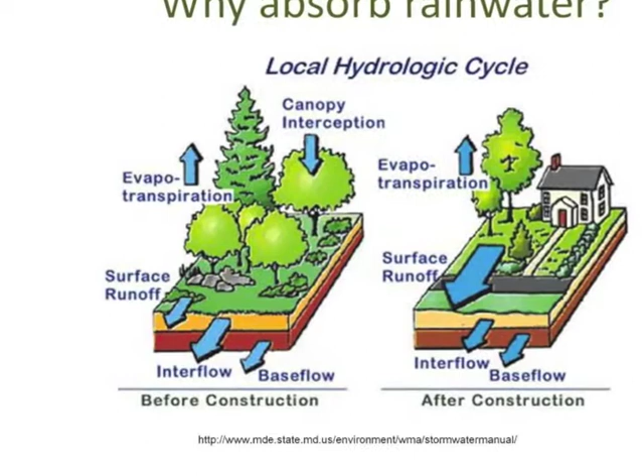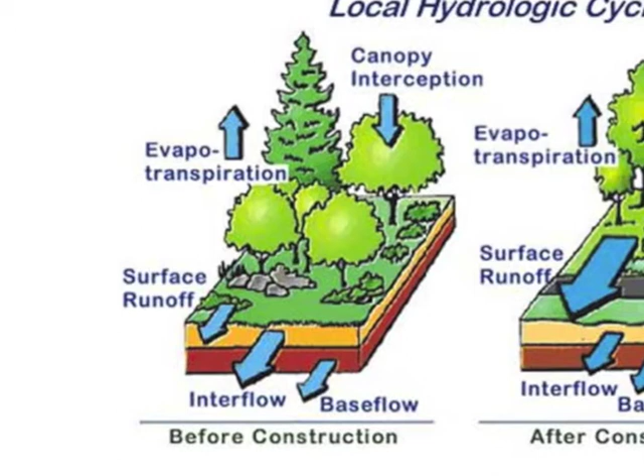This is important for several reasons. When rain falls in nature, most of the water is absorbed into the ground. Some of that water will be used by the plants and some filters down to groundwater aquifers. The water that has not been absorbed will flow across the ground to the nearest stream or river. That is called stormwater runoff.

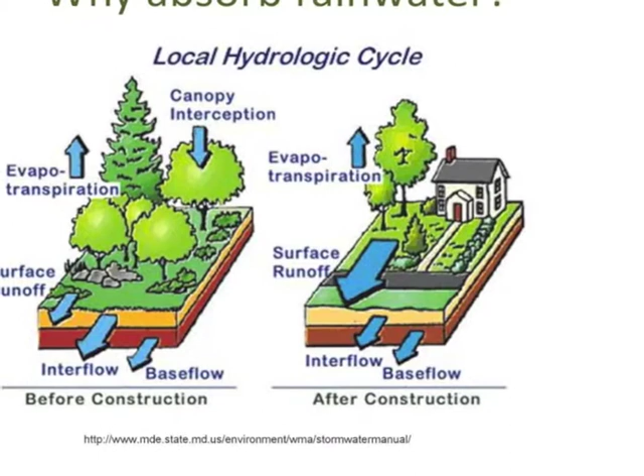When the ground is covered by houses, streets, and driveways, the sponge is gone, so all of the rain that falls turns into stormwater runoff. As a result, there is more runoff than there used to be. That extra runoff can carry pollutants, things like trash, oil and metal from cars, fertilizers, pet waste, and car washing detergents.

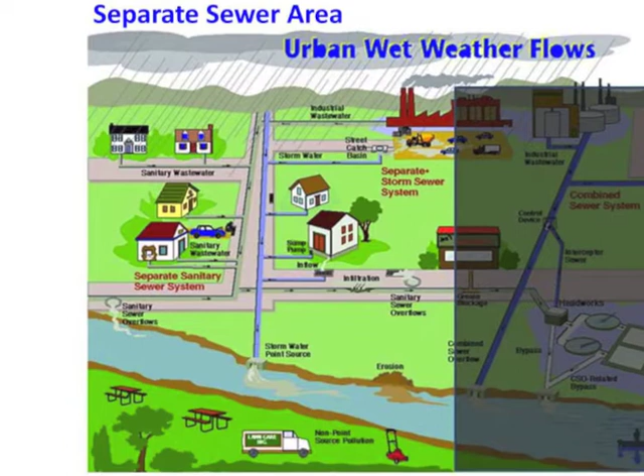Once the water is in the sewer system, where it goes depends on where you are. In most of St. Louis County, there are two sewer systems, like in the town shown on the left side of this picture. There is one set of pipes for sanitary sewage, which comes from sinks, toilets, and other wastewater from our homes. Those sanitary pipes go to MSD's wastewater treatment plants. The second set of pipes are for stormwater only and drain to the nearest stream or lake. These pipes do not go to the wastewater treatment plants.

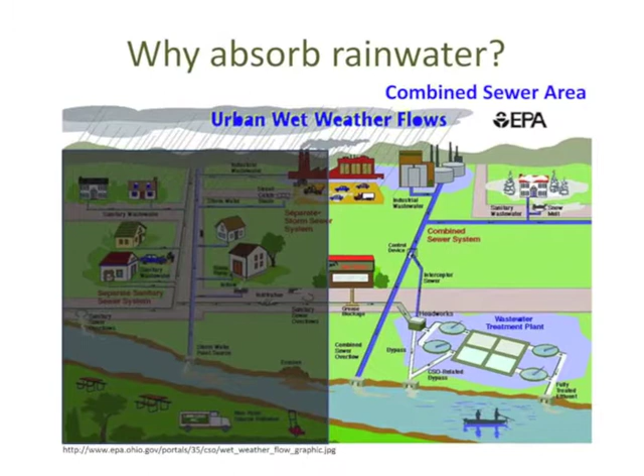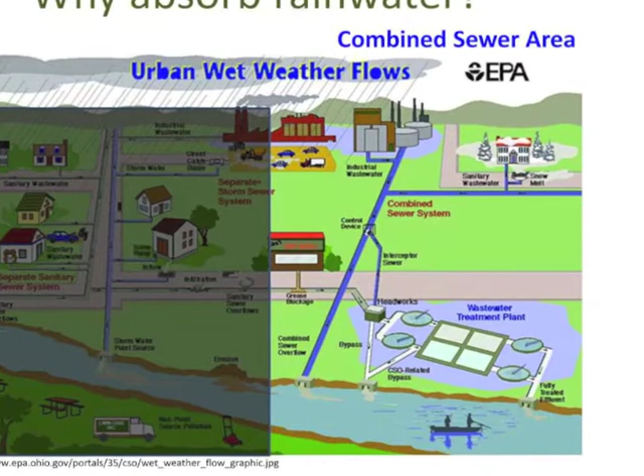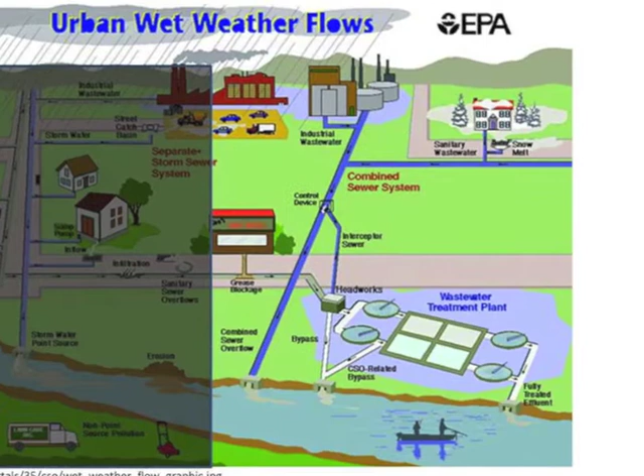In St. Louis City and older parts of the county, there is only one sewer system, like in the area on the right side of this picture. This system is called a combined sewer, meaning that sanitary sewage and stormwater runoff goes to the wastewater treatment plant. During very large storms, the system can't handle all of the extra stormwater runoff, so it has emergency overflows that go out to the river. These are called combined sewer overflows.

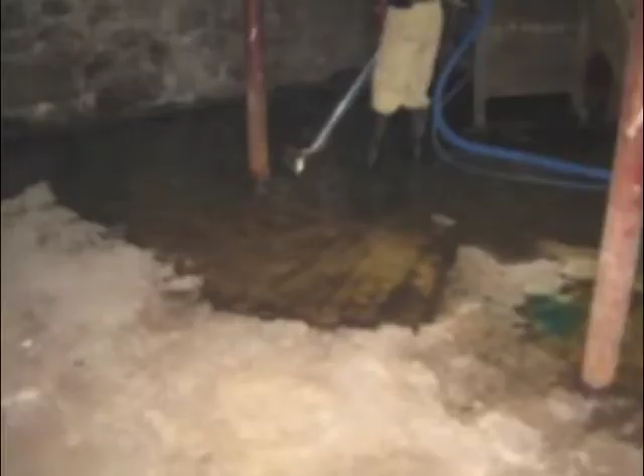Whether you live in a separate or combined sewer area, too much stormwater runoff can cause serious issues such as flash flooding, stream erosion, water pollution, sewer backups into homes, street flooding, and additional costs at the wastewater treatment plant.

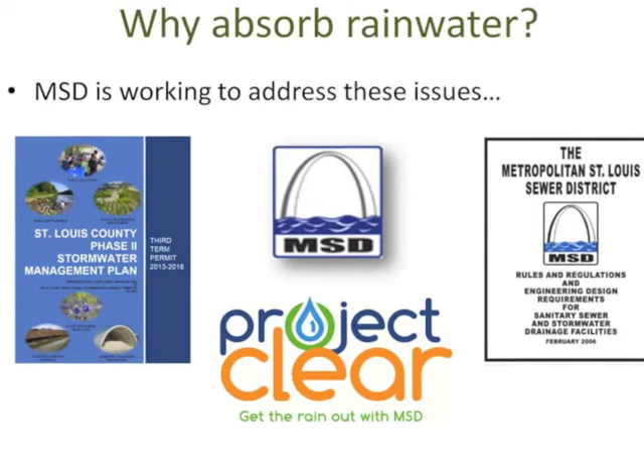There are many ways to address stormwater runoff and water quality issues. MSD has several plans to alleviate these issues, such as the Stormwater Management Plan. This plan is in partnership with the municipalities in the county and is a comprehensive plan to improve water quality in our area creeks and rivers.

Project Clear is MSD's 23-year, $4.7 billion initiative to address water quality and alleviate many wastewater concerns in the region. This includes working with landowners to eliminate stormwater sources, separating some combined sewer areas, upgrading the sewer systems and treatment plants, making larger tunnels to store more rainwater, and building rain gardens and other rainscaping projects to absorb water before it gets into the system. Also, throughout the district, MSD's rules and regulations are designed so that new developments cannot make the problem worse.

Rain gardens not only serve a purpose, they can also be very lovely. You can use flowers, grasses, or a mixture of both. Native Missouri plants are recommended because they are adapted to our wet and dry seasons. There are many native plants to choose from.

You can use different techniques to add a border to your garden, such as brick or stone. Rocks are a beneficial addition where the water flows into or out of your garden to keep the soil from washing away. Gravel or mulch can be used to cover bare areas. As long as the rain garden works the way it is designed to do, you are free to decorate it with plants, rocks, borders, and statues. It's your garden, so have some fun with it.

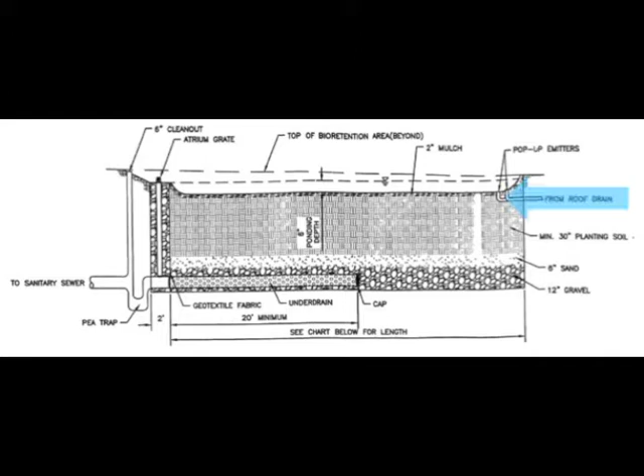Here is a picture showing a cross-section of the garden so we can show you what happens below the surface. Rainwater from your gutters comes into the garden. The water starts to fill the garden and filters through a layer of sandy soil. If it rains a lot, the water goes to an underdrain layer, which is a perforated pipe surrounded by gravel. That pipe then goes out to the sewer. In case of a very heavy storm, there is an overflow drain at the end of the garden.

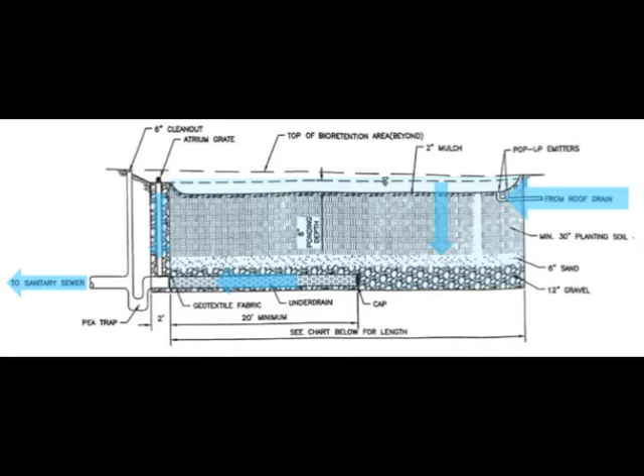The Habitat for Humanity gardens should have 6 inches of ponding depth from the top of the mulch to the drain. The plants in your garden use some of that water. Their deep roots help keep the soil open, and they make your garden beautiful.

Planter boxes work in a similar manner to rain gardens. The main difference is that a planter box sits next to the house and is encased in concrete to keep water from getting into the basement or causing foundation issues.

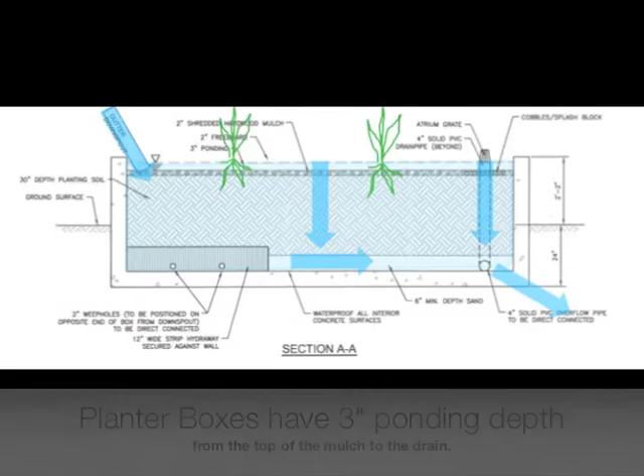To ensure that the gardens stay in good condition and continue to absorb rainwater, each garden has a maintenance agreement with MSD. The agreement is registered with the city, so it gets transferred to whomever owns the house. This agreement requires that the garden be permanently located within the reserved area shown on the map attached to that agreement. The owner of the property is to maintain the garden in conformity with an approved stormwater maintenance design, maintenance, and operation plan. The owner is also to maintain the drains and underdrains in good working order.

MSD will periodically inspect the rain gardens and planter boxes to make sure that they are working properly. Routine maintenance is important to keep your garden functioning and beautiful. Keeping an eye on your garden can help you catch problems early on. Remember, routine maintenance is much less expensive than major repairs.

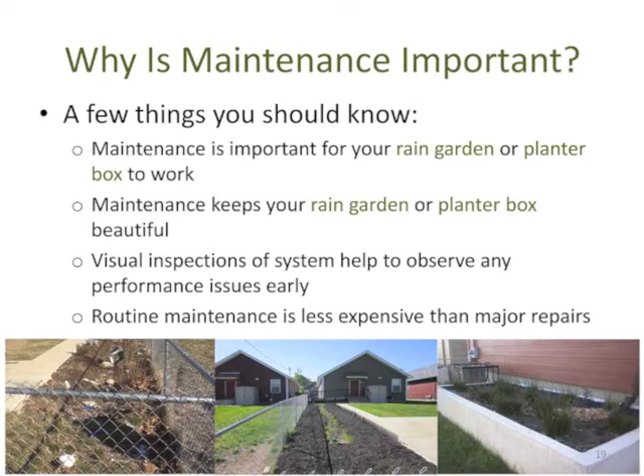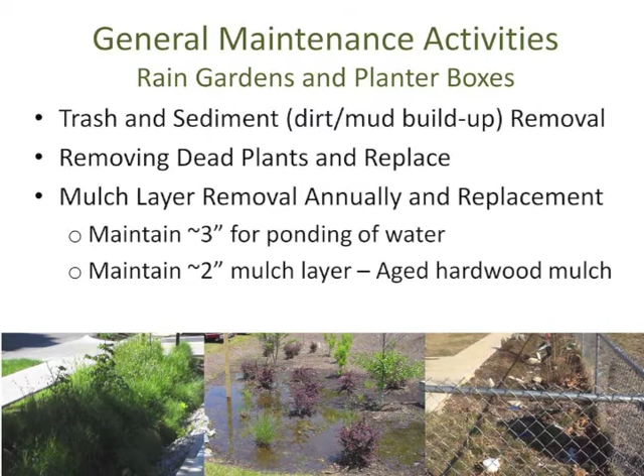In general, rain garden maintenance is similar to any regular garden, but you shouldn't need fertilizer for native plants. Make sure that you remove trash and sediment from your garden. Remove and replace any dead plants. You should also replace the mulch once a year, being careful not to fill in the ponding area.

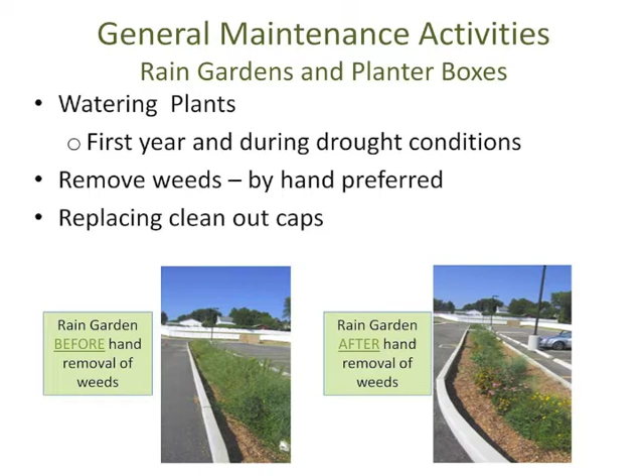You will want to baby your gardens for the first few years. Keep the plants watered, especially during hot and dry times of the summer. Keep your garden weeded. This will take less time as your garden plants start to spread. When you weed, pull the weeds by hand instead of using weed killer. Make sure to replace broken or missing drain covers or clean out caps.

In the early spring before new growth starts, trim back the old flowers and grasses. Remove dirt that is washed into your garden area. Rock mulch can be taken out and rinsed and then placed back in. After new growth starts to appear, check your plants and replace any that died during the winter months.

After 3 years, some of your existing plants can be divided and planted. This is also a good time to replace your mulch if you need to. Mulch should be about 2 inches thick to help keep the moisture for the plants and control weeds.

In the fall, check your garden for eroded areas and fill with soil and mulch or gravel. You should repair any bare areas in the yard that drain to the garden to prevent soil from washing in. Freshening the mulch in the fall can help reduce weeds in the spring and will help feed your garden as it breaks down over the winter.

During the winter, be careful not to pile snow on your garden, as this could compact the soil as well as cause damage to your plants. Also, try to avoid using salt in areas that drain to the garden. Most of your plants won't tolerate it well.

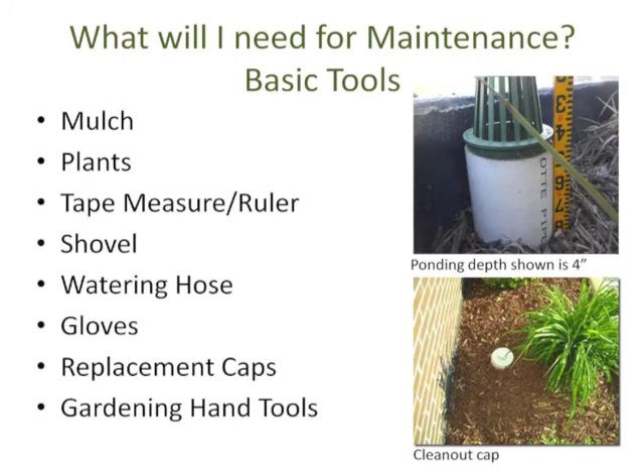Typical tools needed to care for your rain garden or planter box include mulch, plants, a ruler to measure ponding depths, shovel, watering hose, gloves, replacement caps, and other gardening hand tools.

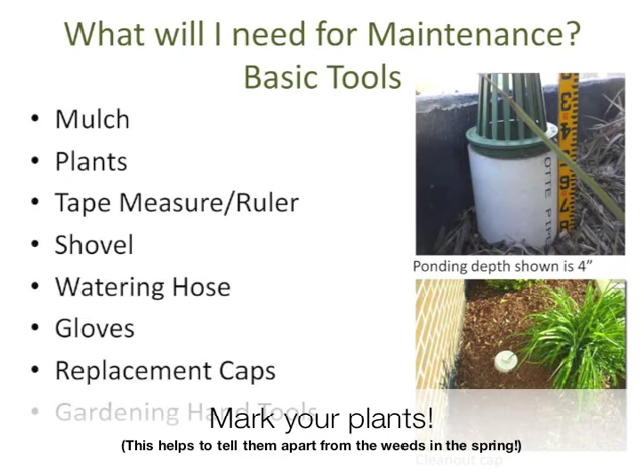Especially after it rains, you will want to see how well your garden is performing. There should be water ponding on the surface right after a heavy rain, so don't fill it in. If the water is still sitting in the garden after 3 days, then you may have a clog.

You may need to rake or poke shallow holes in the soil. If that doesn't work, then replace the top layer of mulch and soil. Make sure to remove trash and sediment. Muddy water can come from eroding areas in your yard and could lead to clogging. Repair the eroded areas quickly and remove the sediment that settles on top of the mulch.

If you have any questions about maintenance, please call MSD.